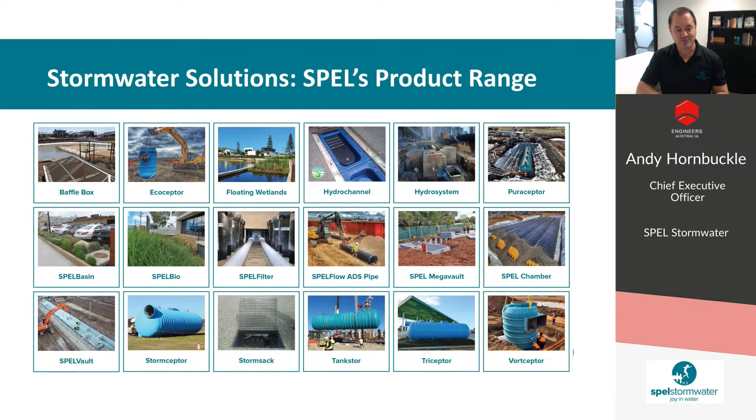So I have a big reveal to make today. Our current name, SPEL Stormwater, no longer actually represents who we really are and where we are really going. The name SPEL has served us very well for a long time, and it's been a terrific part of our environmental journey, stopping oily water, fuel spills and gross pollution from entering our shared streams, rivers, bays and seas.

I'm very pleased to tell you that we've arrived at a collective, unanimous decision that we are going to rename as Atlan Stormwater. Atlan was the greatest king of Atlantis, and he was also known as the protector of the oceans. And that is who we are, and that is where we are going.

Nothing will change the quality of our people, products, and our service, the generational assets you currently enjoy from us. Our values, team, and innovation will remain. And at Atlan Stormwater, we will continue our work as zero pollution ambassadors who wholeheartedly believe that clean waterways are a right, not a privilege. Our commitment to supporting not-for-profits, Rapid Relief Team and Stormwater Shepherds will continue.

As the founder of Stormwater Shepherds, I can't resist this opportunity to promote Stormwater Shepherds' mission, which is to guide and inform communities and councils how to better maintain their stormwater infrastructure to tangibly stop plastic and gross pollution at the source. As many of you know, the stormwater network is the unfortunate and unsuspecting conveyance system or highway for plastic and gross pollution to reach our shared streams, rivers, bays and seas.

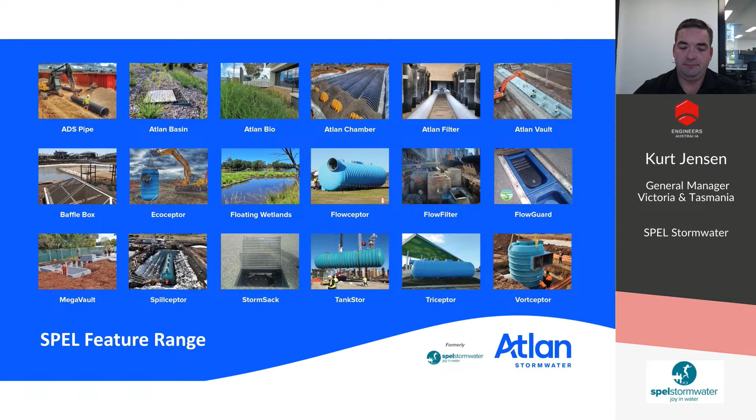With SPEL, we have an entire range, from green to grey, you might say from wetlands to GPTs, oil water separation, everything in between. That's our lineup, and it's all built here in Australia. There's a few images of our fiberglass plant and our rotomolding plant. We also have multiple concrete facilities across the eastern seaboard of Australia.

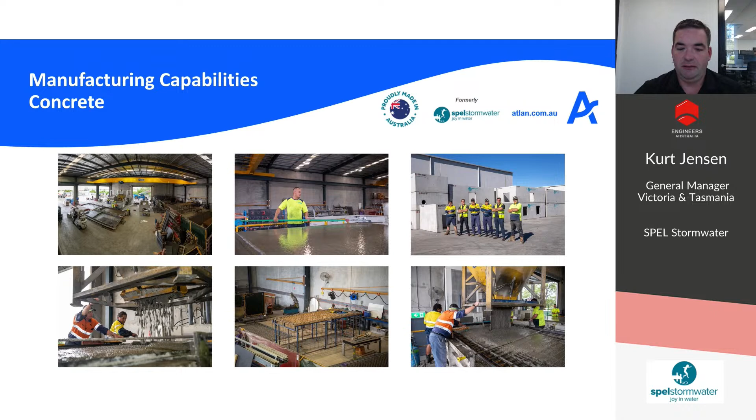But taking a whole catalogue and putting it into a family or groups of products is what we like to do most. That's where we add value to what you do. We become a partner, not a supplier. We become part of your family, an indispensable asset to you.

So starting at the top here, we have our primary treatment. This is where we're focusing on gross pollutants and suspended solids. It's the start of any treatment train. We have options for engineers, councils, and contractors. So there's 4 different GPTs, from your typical pit insert sack through to your well-recognised continuously deflective separating Vortceptor.

We have multiple tertiary solutions. So that is our Hydrosystem, the SPEL Filter, the Hydrochannel as our mechanical, you might say, rain garden in a tank style treatment. Then we have our green assets, which are the floating wetlands and the SPEL Basin, along with our SPEL Bio. So there's options in the tertiary end of the world as well.

We get into detention or water storage underground for harvesting. We also have options. So we have our fiberglass tanks, our chambers, our SPEL Vault, and our MegaVault. These solutions provide more flexibility for you. We also have our pipe, which many of you would know of, and our oily water separation. I guess it's about having more tools in the engineering tool belt.

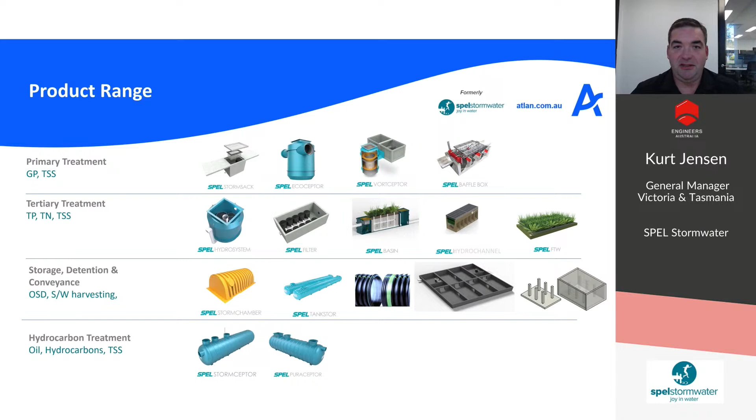And then we take that range of products and we place it into, I guess, a tangible treatment train. This is really where the rubber hits the road. We, I guess, have learnt over the years that no single asset will do a whole treatment train efficiently.

If you get just a bioretention system and put gross pollutants and neat mud into it, it isn't very efficient. It's the same as a gross pollutant trap, not very efficient at phosphorus and nitrogen. So we believe in treatment trains, and that's how we design our projects. Typically we'd start with a primary treatment solution, then have a tertiary treatment device, and then detention would fit in there as well. We can help you model these through MUSIC.

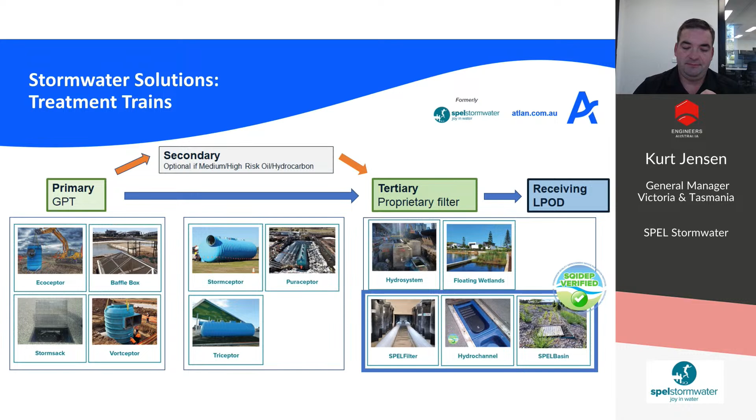Thank you, Kurt. A topic I'm super excited and passionate about. I'm currently serving on the Stormwater New South Wales Committee, and previously served on the UDIA Circular Economy Committee, and I've been witnessing the fields of engineering and sustainability aligning closer together. We're still not there, however, and more has to be done to ensure that the transfer from linear economies to circular economies is both successful and seamless.

As the water industry is essential to any economy, the Institute for Sustainable Futures at the University of Technology Sydney has released quality research on this topic, and they've identified stormwater as one of the five main pillars of the whole cycle. Hence, developing innovative and sustainable solutions that stop pollution reaching our precious waterways is absolutely fundamental to a thriving circular economy. So on that note, I'll hand back to Andy to present some of our innovative stormwater quality improvement devices and solutions that are revolutionizing the industry, positively contributing to future thriving circular economies.

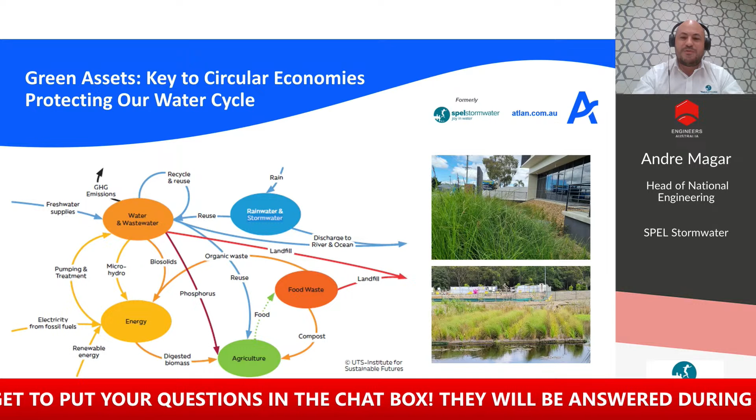Thank you very much, Andre. I'm really excited to speak to you about floating wetlands. Everybody has a pet product, and floating wetlands is my pet product.

So when we're engaging in building man-made floating wetlands, we're actually engaging in biomimicry. And this is what I love about it—we're just taking nature's processes and pathways for pollutant removal, and we're mimicking them.

So what is the difference between a conventional wetland and a floating wetland? On the screen you can see a sectional view and plan view of a conventional wetland. You've got the inlet forebay, and then the macrophyte zone where you've got the wetland plants, and you'll be getting treatment of the water in the rhizome layer of the macrophyte zone, about 250 to a maximum, say, 400 millimeters of treatment. Now just imagine if you dug that out and it was 1.5 to 2 meters deep, an open water body, and we put the floating wetland on top, right where you see those macrophytes, and you've got the plant roots hanging down into the water column 1 to 2 meters deep. What you've just done is taken what was a 250 to 400 millimeter treatment zone and tripled it. So we have this massive scalable system in the same footprint, and that is the power of a floating wetland.

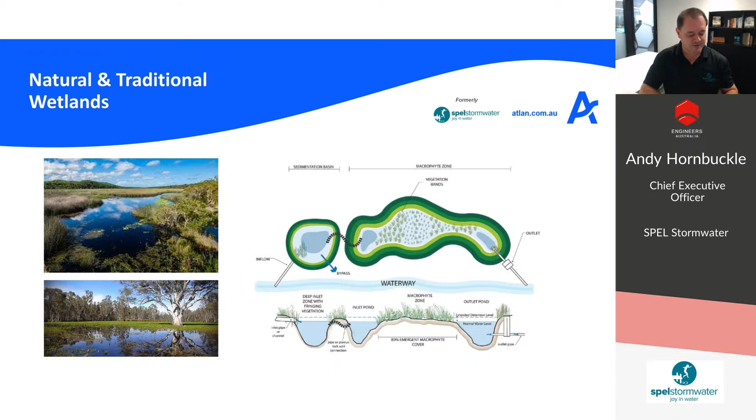It's very simple science—there's no black magic about it. It truly works. What we're really doing is engaging in biological warfare: getting more of the good microbes to compete with the bad nutrients, the pollution in the water, and remove it.

In any given water column we have 300 to 600 species of microbes generally. When you put a living surface area like plant roots into that water column, you're providing them with a habitat to live in, because the plant is alive and it's putting a layer of oxygen into the bottom layer of biofilm. So it's a very healthy, robust environment for the microbes to live in, and then they help to filter and treat the water from there. The plants also take up nutrients and help filter the water as well.

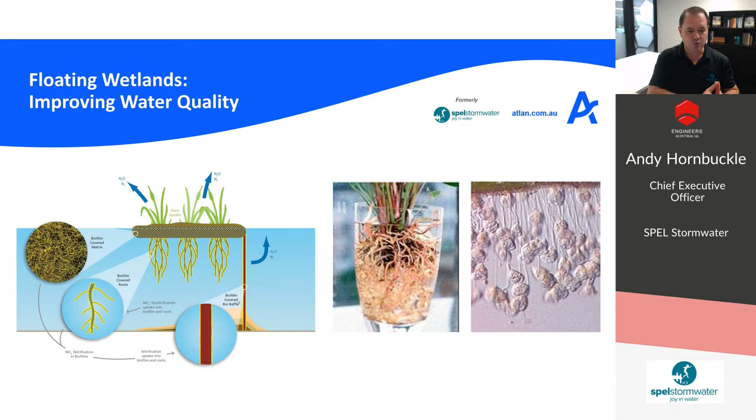The thing with floating wetlands is you've got to get the plant root system to come into contact with the water column. In our picture on the left, from a wastewater site, we've put a curtain off the back of the wetland, chain weighted to the base of the lagoon, with slits in the top of the curtain, forcing the water to come up and have contact with the root system. We work in wastewater, freshwater, and also brackish or saltwater environments, so the wetland systems are very versatile.

We prefer to put these systems offline because it helps with retaining sediment. When you've got an inline system and get high velocity, large flows of water coming down that waterway, you can have sediment resuspended. We've got very good designs, which we don't have time to go into today, whereby we can set systems up offline but still work with fluctuating water levels when you need to.

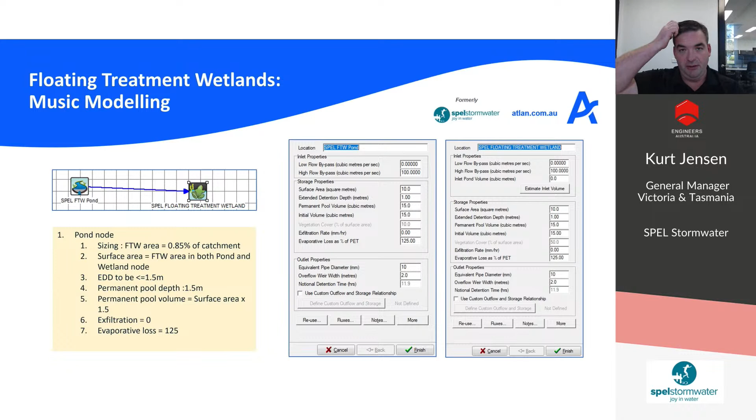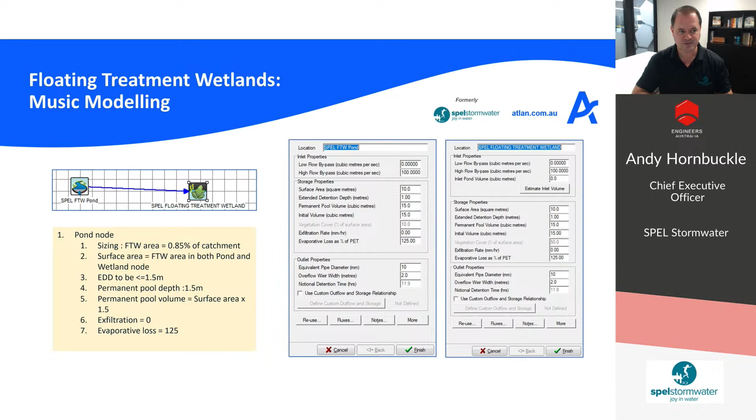Probably just one quick thing I'd point out on that slide is that the 0.85% of the catchment is for when you're modelling for an 80, 60, 45% reduction in the MUSIC program for suspended solids, phosphorus and nitrogen. If you actually have a treatment train, it could be less than 0.85% of the catchment. Is that right, Kurt? Yes, that's correct, and that's why it's our starting point. That's your rule of thumb, and then you confirm, refine and downsize from there.

So the second big reveal for today is that we're releasing a new floating wetland technology onto the market. You can see the two triangle floats on the screen here, and then we've got a removable plant box which we can have loose media in.

We've got over 15 years of experience with floating wetlands across hundreds of projects globally. We've developed this product because we wanted a system with highly engineered anchor points for inline applications and for large lake applications where you get a lot of wind chop and even waves.

So we've designed this wetland to be very flexible and to be able to move with the water, not against it, like a hard, rigid pontoon. As you all know, water is a constantly moving surface, and anything that's constantly moving is destructive, so we've designed this wetland with that in mind, that we will move with the water, not against it.

A key advantage of having the inset basket with the removable media is that, as you know, wetland plants have a life of between 3 to 6 years, just depends on the situation and geography. What we've found with some wetlands is that we get invasive aquatic weeds or weed species getting into them, and it's very difficult to remove and replace. What actually happens is the plants completely take over and become a big mass of organic matter, which makes it difficult to remove any noxious species that get in there.

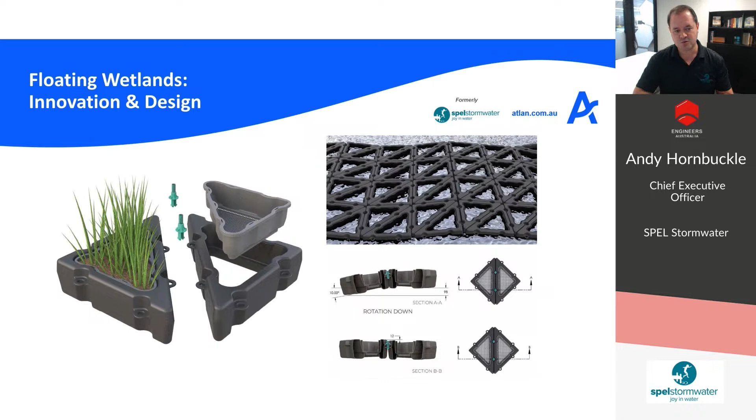The two locator or joining pins that you can see there are designed with an anti-vandalism element, so there's a method and a tool involved to be able to remove those. We're very excited about this product.

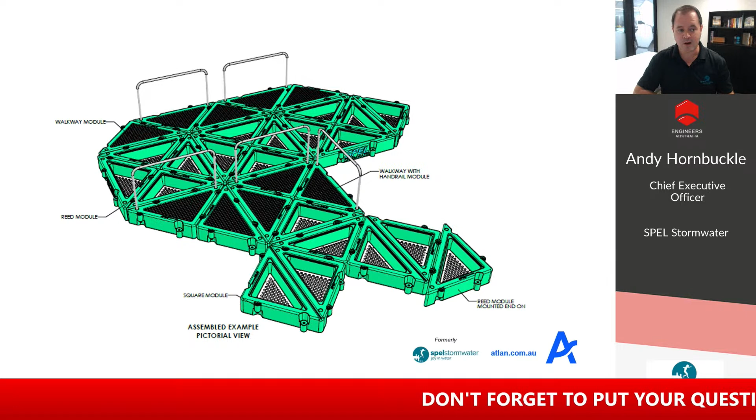The other thing is that we've done it as a triangle so that we can pretty well make any shape. So if you've got a wetland you need to install that needs to follow the contours of a bank, a stream or a canal, we can shape the wetland as such. We can also have an inset to make safe walkways, and we've got locator pins for handrails, which can also work to support bird netting.

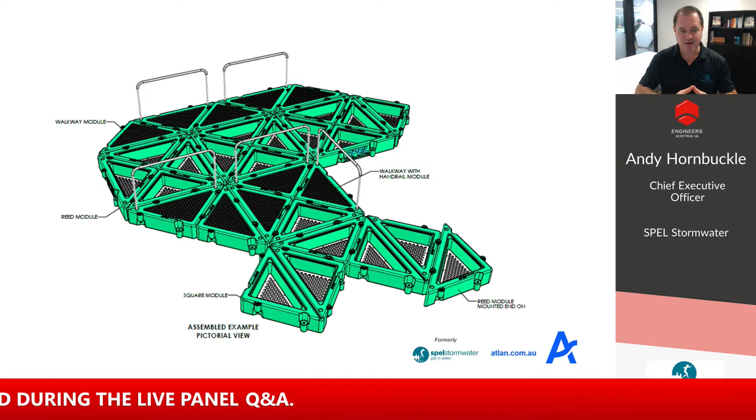As many of you know, when you first install a wetland, be it a conventional or a man-made floating wetland, water hens can be quite destructive on our plants. So sometimes in an area we need to bird net. So this system has been designed with that in mind.

Now, we've been engineering and working on this for a long time, and we've stress tested the product both in CFD modeling but also in the field, and we have a high degree of confidence on being able to install these systems in line. You can see the stress points there. So it's been an iterative design where we've kept on stressing the wetland and also taking into account the velocity drag caused by a fully grown system with plant roots in it. And we feel that we've arrived and we can now bring this product to the market.

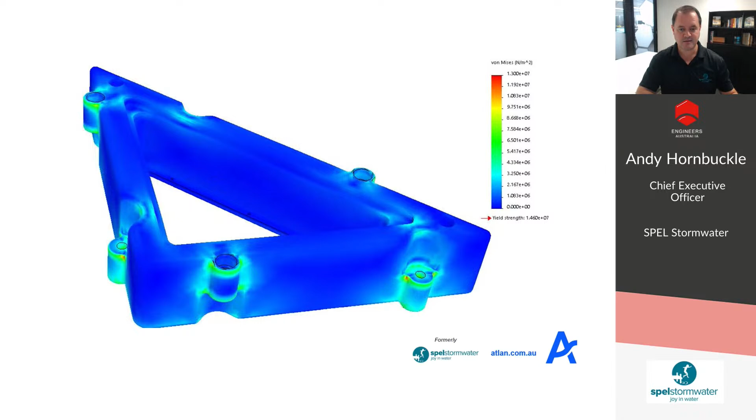So at SPEL, we have invested heavily in research and development over a long time. I first started investing heavily in R&D in 2012 when we brought the SPEL filter technology from America to the market. And the first thing the council said to me in Southeast Queensland was, look, the American data looks great, Andy, but come back when you've got some Australian data. So I set out and did that. I came back, I partnered with the Queensland University of Technology.

The first thing we had to do was work out what was our test protocol, because there was no test protocol in Australia. So we looked at the Auckland protocol, we looked at the German DIBt protocol, and we looked at the American Washington State Department of Ecology protocol, and we tried to pick the best of those that would work for the Australian climatic conditions and the site that we're working with to develop with QUT this protocol that we tested to.

I was really excited when I got 8 qualifying rain events, went back to the council and said, look, here's my data. And they said, well, that's great, but we actually don't know how to assess this. And this is where the whole lobbying Stormwater Australia and talking to them about developing a stormwater quality improvement device evaluation protocol started to happen in the industry in 2014.

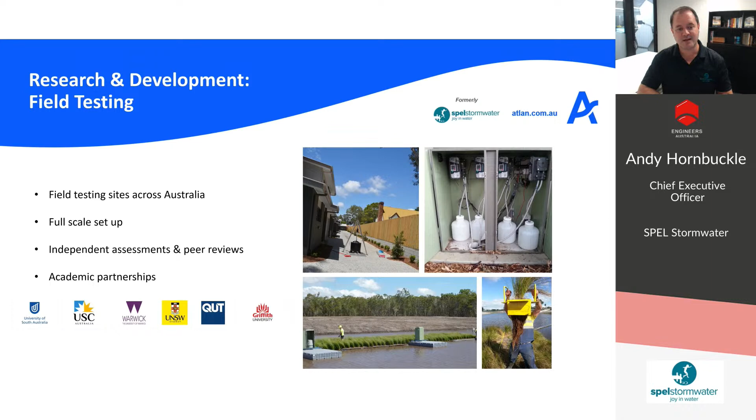So I'm pleased to talk to you about that because SQIDEP, as we call it now, governed by Stormwater Australia, is well and truly up and running and supported by many major councils in Australia, like Gold Coast City Council and Brisbane City Council, just to name a couple. It's also supported by Sydney Water as a major water utility.

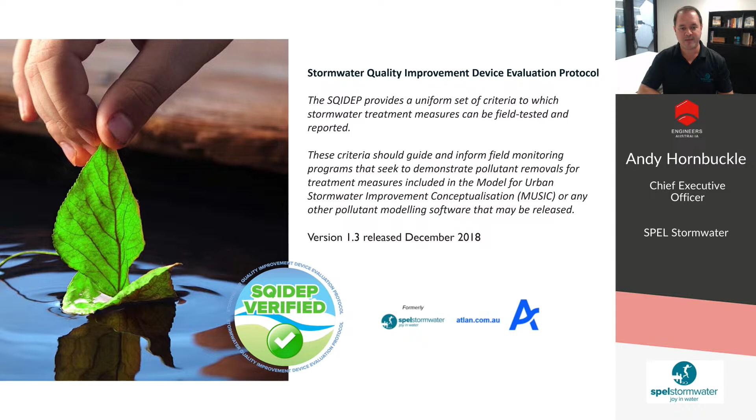So what the Stormwater Quality Improvement Device Evaluation Protocol does for councils is that it provides a uniform set of criteria which has been peer reviewed by the industry and also by a university in Melbourne. It provides measures which proprietary device companies can test any stormwater improvement device against and then see how it performs on an apples for apples basis.

So the problem that councils were facing is that they needed subject matter experts in their teams with the time capacity to assess multiple manufacturers' performance claims. And before this protocol came out in Australia, all the manufacturers were testing with the best intent, but all with slightly different methods. So the beauty of SQIDEP is that everyone has one method to work to. We're not saying it's perfect. There's a review on it coming, and we'll continue to perfect it as we move forward as an industry. But it's certainly very exciting to have a protocol like this up and running, independently governed by Stormwater Australia.

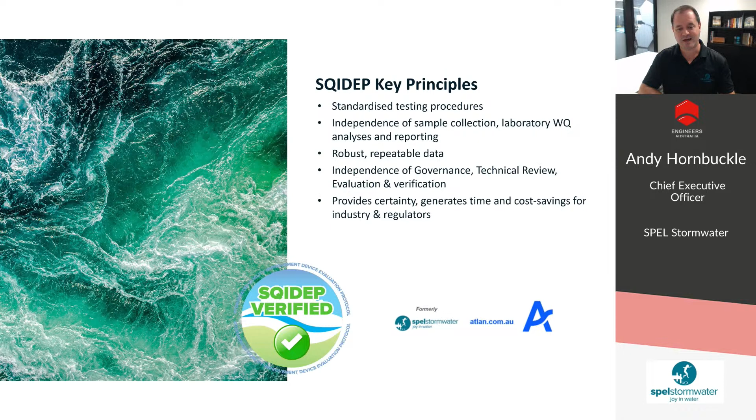The advantage for the manufacturers in working to the SQIDEP protocol is that it's one benchmark and test point that councils can point to, so we don't have to go around to each individual council getting individual approvals for every product every time. As SQIDEP becomes more and more adopted, it will save councils time, it will save consulting engineers time, and it will save proprietary device companies time in working together more cohesively.

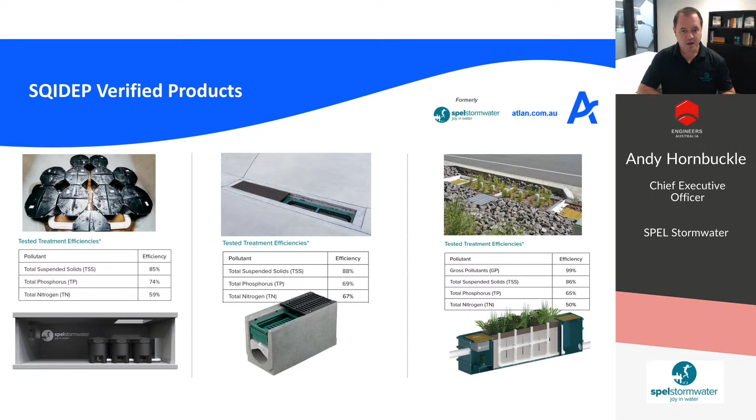So SPEL has 3 verified products at the moment on the Stormwater Australia website. We have the SPEL filter, we have the hydro channel, which is effectively filter media and gross pollutant trap in a channel drain, and we also have the SPEL basin, which is our engineered media in a rectangle basin system. We have currently submitted another 3 products to SQIDEP. We have the hydro system, which is our upflow filter media. We have our baffle box, which is a large inline gross pollutant trap. And we also have our storm sack, which is an in-pit gross pollutant trap.

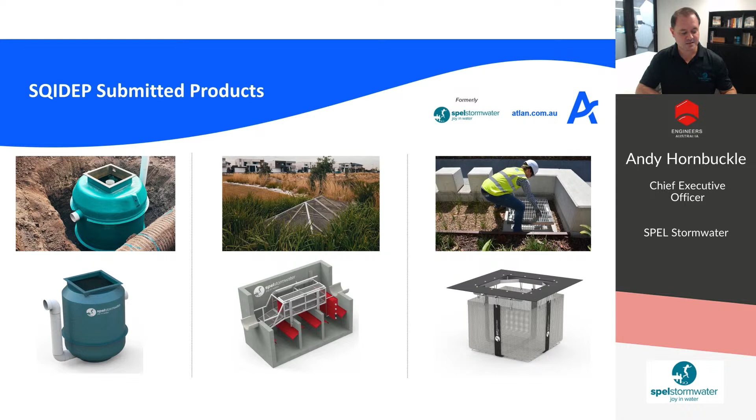So that's an update for you on where we're at with that. And we have many more, well, all of our products are in various stages of testing to the SQIDEP protocol, and we'll keep you updated on those as we move forward.

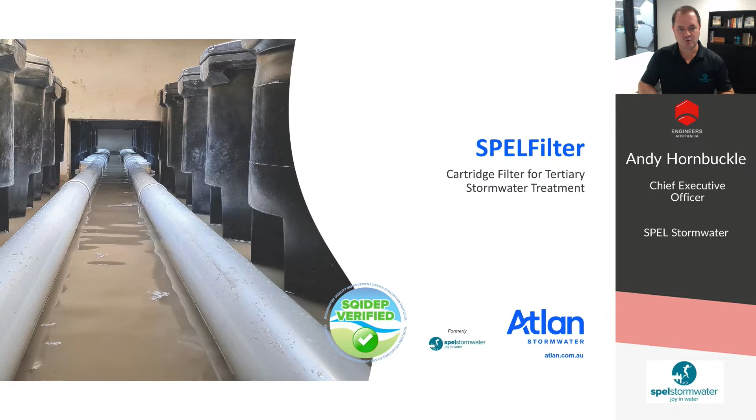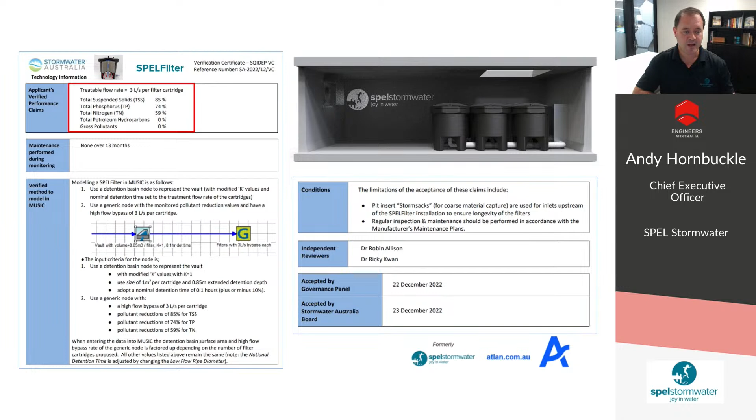It's very, very straightforward. We have 2 cartridge sizes in the SPEL filter. The short one requires a 550 millimeter driving head and treats at 1.5 litres per second per cartridge. And the tall one is an 850 millimeter driving head and treats at 3 litres per second. We believe in simplicity. It's a very simple and practical cartridge design. It's proven over multiple sites to be very effective for suspended solids, phosphorus and nitrogen removal.

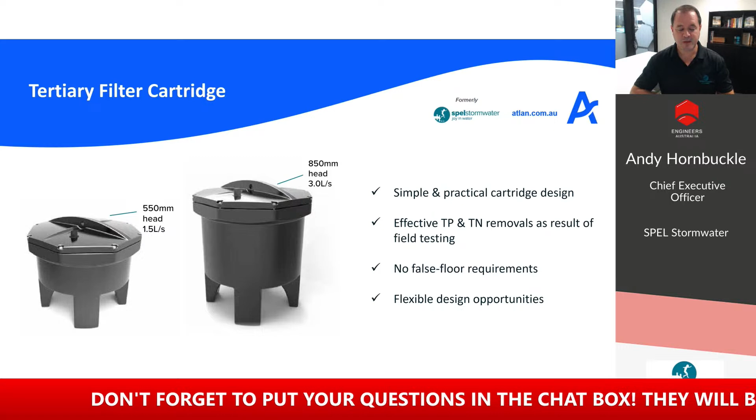There's no false floor requirements for the vault. It can go down in any existing vault if you need to retrofit, treat a site, and we can be very flexible with the design opportunities with the system.

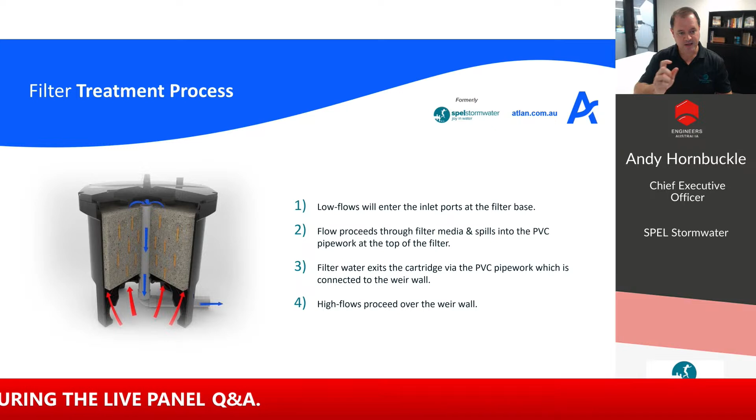So how the cartridge works is that the water comes in the bottom and up through the filter media, and there's a void space at the top for the water to fill, and there is an air release valve. So when the head is fully activated, it actually activates a true siphon, so that these cartridges will actually siphon down a vault, and then when the siphon is broken, it will backflush the cartridge.

We can give a 5-year warranty on any site for the SPEL filter for performance. The only condition being that we have an active maintenance contract on the site. The reason we can give that warranty is because of the backflush function of this device. It means that the filter doesn't get clogged up with the heavy sediment, and it can focus on the fine suspended solids and the nutrient removal, and then we can vac out the vaults when we go and visit the site 3 times a year or every 4 months.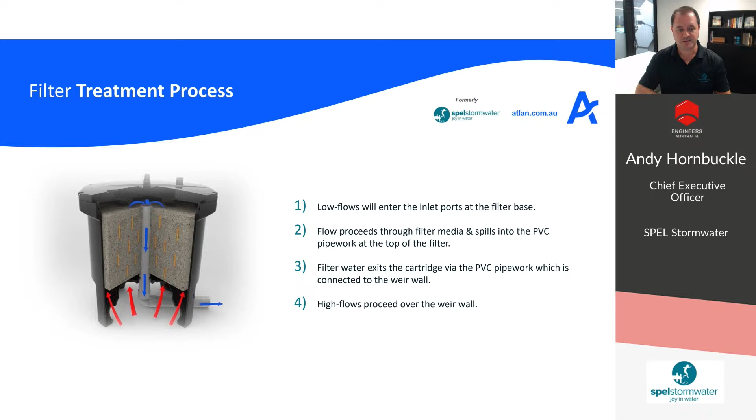We're working with this product to make it a truly swap and go cartridge system, a bit like your swap and go gas bottle from the service station. So this actual HDPE cartridge will last for decades. As we all know, the problem with plastic pollution is that plastic doesn't go away, it doesn't decompose.

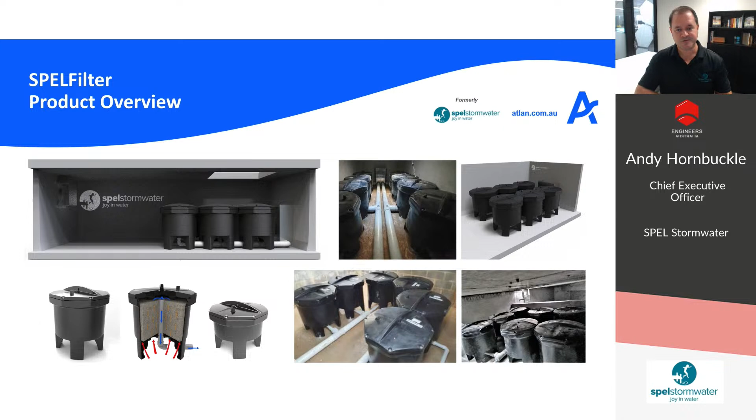So talking from a circular economy perspective, we have these cartridges that we can reuse time and time again. We can reuse them for decades. We just need to replace the media in them to ensure that the cation exchange for the nutrient removal is maintained. So that's it for the SPEL filter. And with that, I'll hand you over to my colleague Kurt again to speak to you about the Hydro system, our Upflow filter technology.

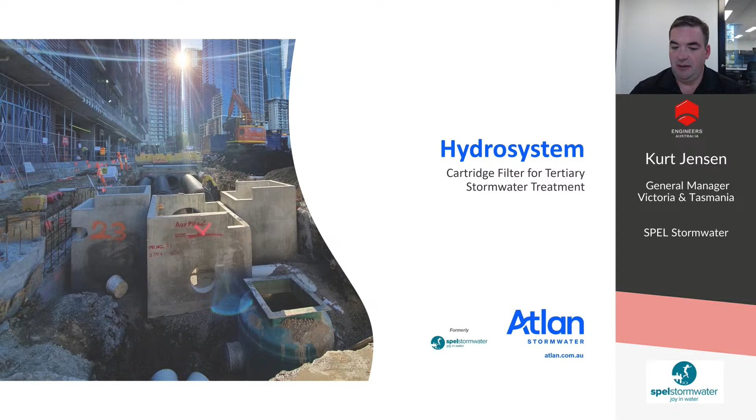The Hydro system is a very, very versatile tertiary device. You can see in this image here, it's on a high-rise building installation. It can be used on many different types of projects, from industrial, residential, high density, medium and low density. It is a tertiary device and obviously built inside our fiberglass structure. It has cartridges in there which are scaled to suit the flow rate required for your site.

It requires 250 millimeters of hydraulic head to operate. That can be configured in anything from 0 to 250 millimeters of fall in your pipe work. So it makes it very flexible, especially for flat sites.

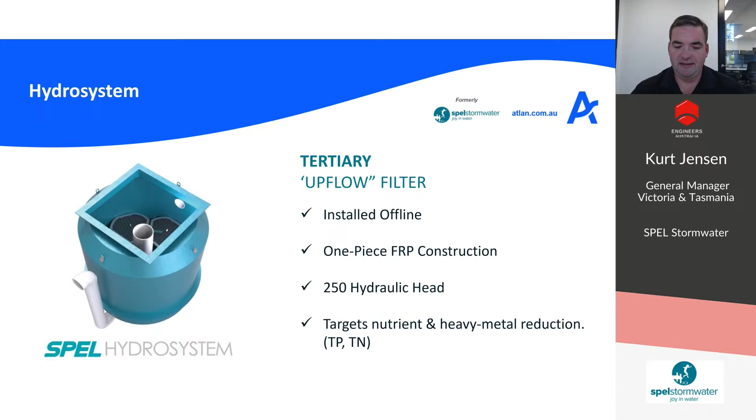How the system works: the water comes in the inlet pipe, which is labeled number 1, drops into the base of the unit, which isn't a massive sump, it's small. This is a tertiary device. It would normally be after either our StormSacks or an EcoCeptor GPT style treatment.

Could be a swale. The water will flow up through the cartridges, which you can see labelled as number 3. And they are just like the SPEL filter. The water passes up and out the top in this situation, and out the outlet pipe in number 4. So it's a wet sump as opposed to a dry sump structure.

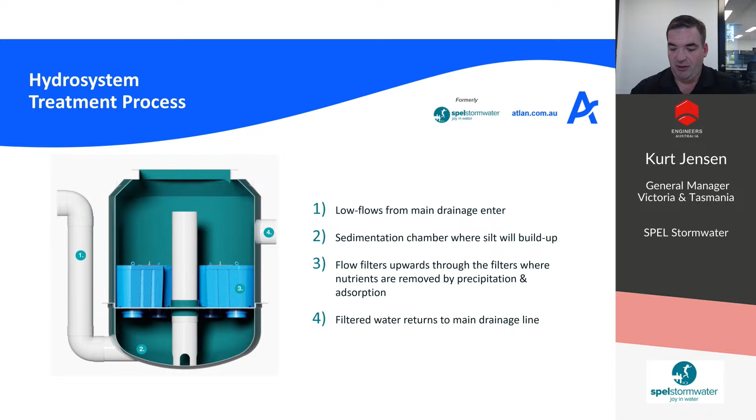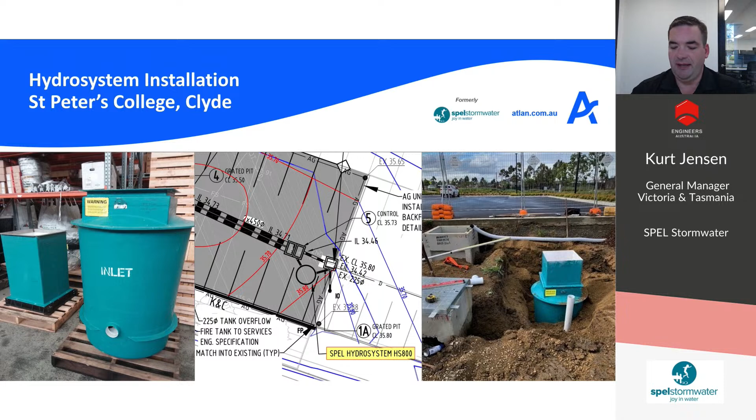Obviously, every project doesn't have the luxury of that sort of install. We do quite a few projects where these are suspended from maybe the underside of level 1 or 2 in the CBDs of Australia. And that is because these buildings have Green Star requirements to hit, and more sustainability targets, which we can assist doing, potentially pick you up a point or two in the whole design and install of the hydro system, or whichever product it is.

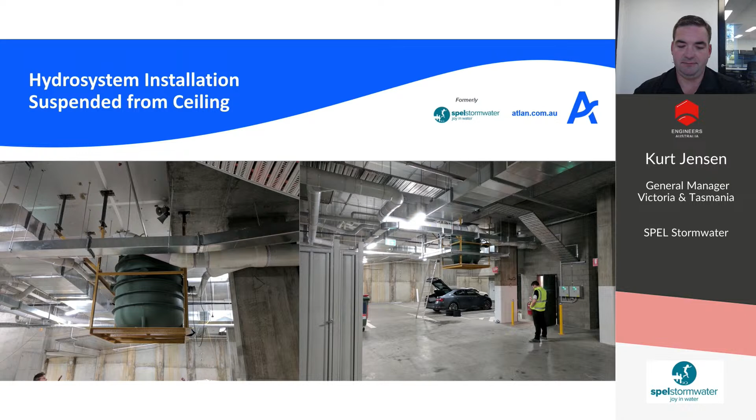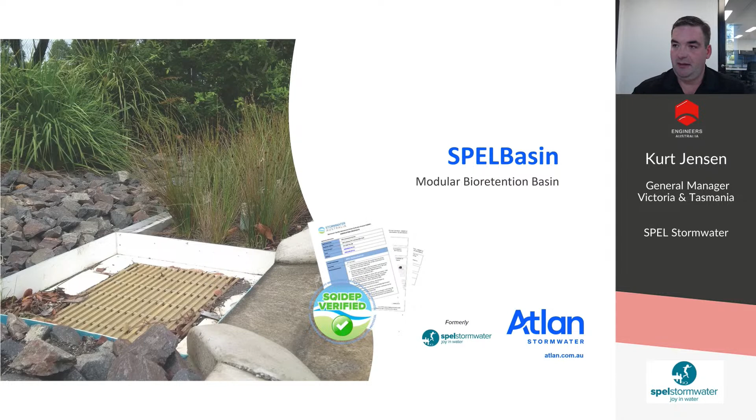So now we change gears a wee bit and go into the SPELBasin. The SPELBasin is a modular bioretention system, and it is SQIDEP verified. There's a screenshot of the SQIDEP verification alongside our Hydrochannel verification. So the basin is verified to 86% suspended solids, 65 phosphorus and 50 nitrogen, also 99% gross pollutants. So it truly is a standalone system.

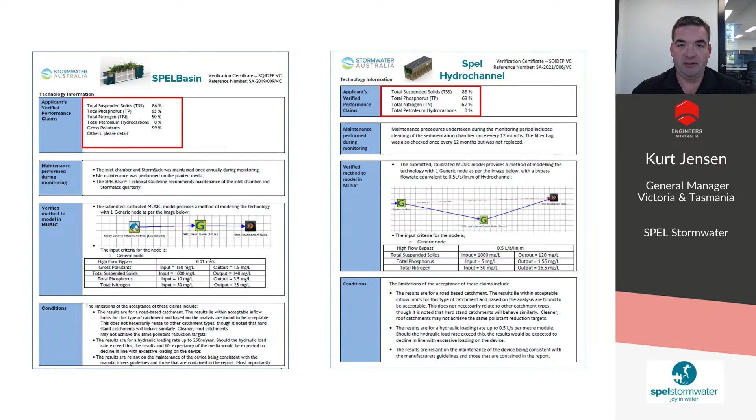The inlet chamber is effectively a gross pollutant trap integral to this system. And that's designed to take out all of your Coke bottles, chip packets, cigarette butts, your gross pollutants, your sediment, and also your hydrocarbons through our coalescing filter. So the water's definitely done its primary and some of its secondary treatment before it actually goes into the media layer.

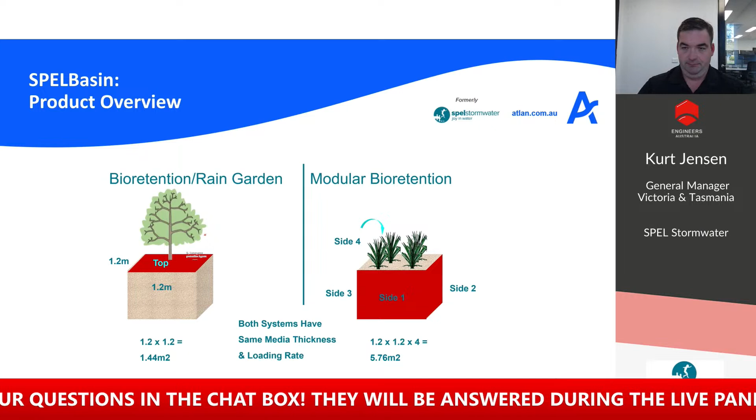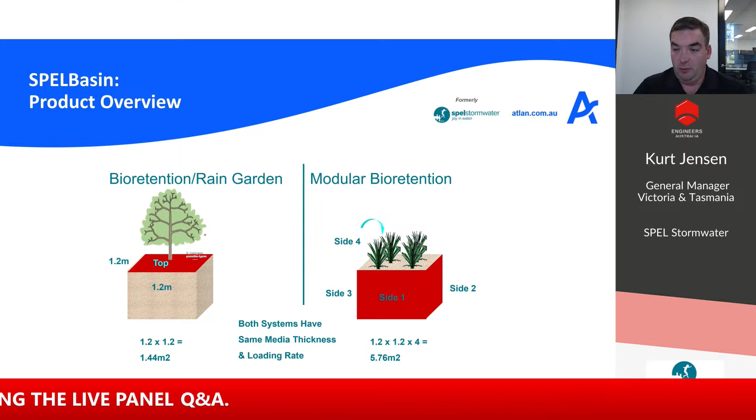This requires less fall or hydraulic grade to make the system activate. It also compresses the footprint, in this instance to just under 1.5 square metres for a SPELBasin, doing the same job as just under 6 square metres for a normal rain garden. So that means we can treat a much larger catchment in that footprint.

What you design as an engineering firm and what you approve as a council will truly be in the ground and functioning to the SQIDEP verification. And that's the benefit of a pre-designed, pre-constructed, prefabricated device that has been SQIDEP verified.

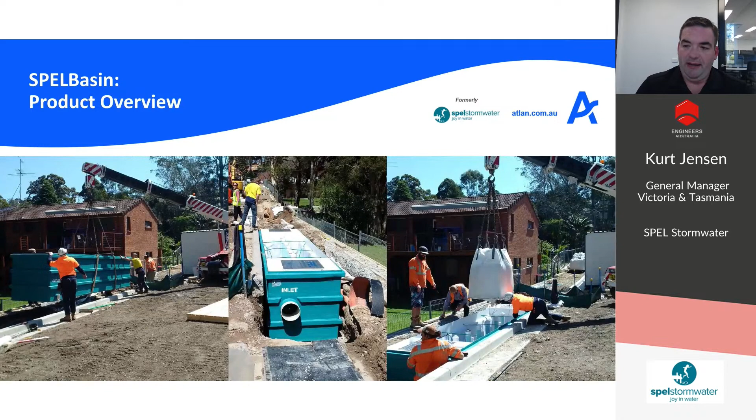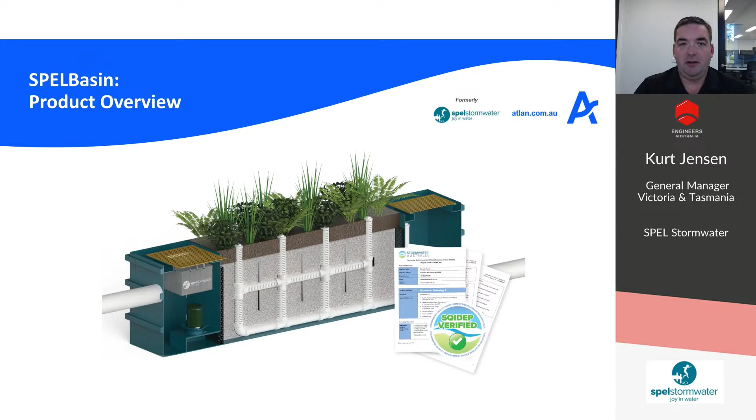If we go back to the section view of the SPELBasin, you can see where that was. That's that left-hand chamber. With a vac truck and a high-pressure gurney to wash that out, rinse it and suck it all out, this will be back to as good as new with zero impact on the filtration media. Truly is a treatment train in a box.

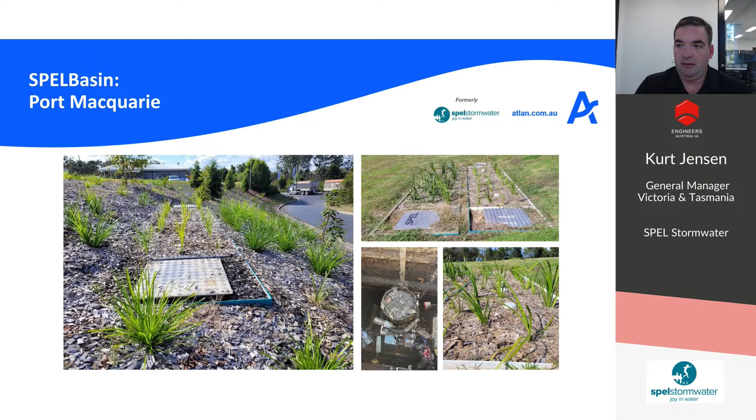The hydro channel, another one of our SQIDEP verified systems, is effectively useful in two applications. One, small developments like you can see, and two, with bypass catchments. So a catchment that isn't going through your main treatment train. Typically, the going way to design bypass catchments is to over-treat your main outlet and not treat the bypass catchment. It's actually very inefficient. Costs a lot more in capital or CapEx and a lot more in OpEx to maintain as well.

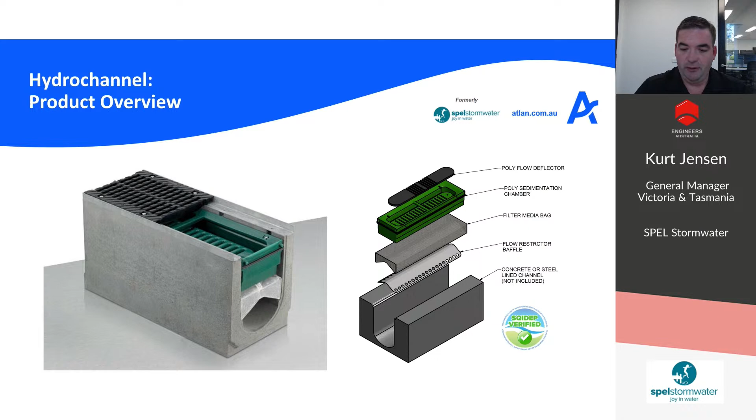The Hydro system solves that challenge. What it is, is a treatment device, a full treatment device. So it's a gross pollutant trap and a tertiary filtration system inside a 300 mil wide trench drain, trench grate or channel drain. You can see at the base it has a flow deflector to make sure we keep a void underneath it. It has a media filtration, and then on top of that, the green part is like your gross pollutant trap with a hydrocarbon baffle in there. It truly fits within a 400 mil deep channel drain, making it very simple.

This next little project here is an example of a bypass catchment. Dan Murphy's little loading dock was falling away from the main outfall by using 3 metres of hydro channel in a 6 metre channel drain. We were able to meet full compliance without doing any changes to the main treatment train.

It saved a lot of drainage as well. This development in Howrah in Tasmania is a prime example of where hydro channel comes into a league of its own. It's a 1,200 square metre parcel of land which had a house on it. It got knocked down, 3 townhouses put on it. One of the challenges with little developments like this is the cost of the stormwater treatment as a percentage of the project value.

The hydro channel here, we're able to configure the roof drainage to fall into the top of it. With the StormSack, only a $4,500 investment, which means the maintenance will be lower, and it's a win-win for everyone.

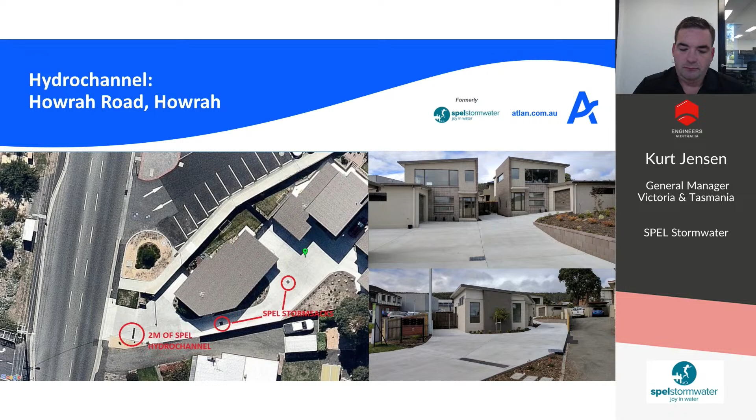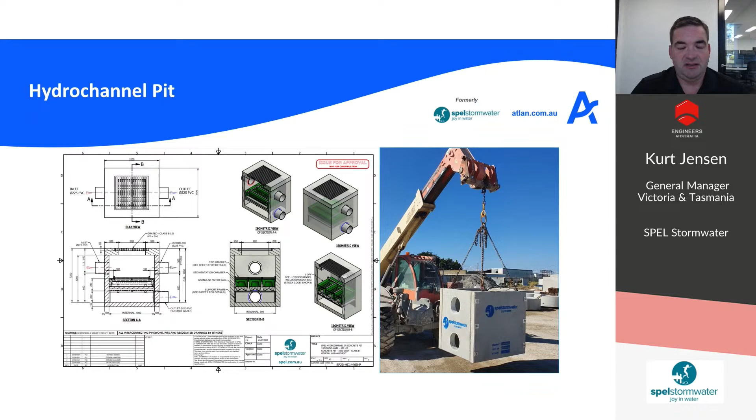We also have the hydro channel configured to fit within a pit as well, so it can be used at end of line as a tertiary device. Just another option. So having all these products, we're able to pull them into a design.

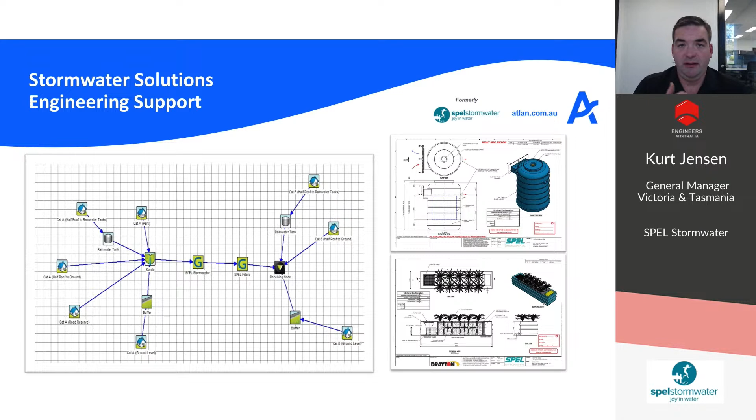Typically the recognised software is MUSIC. We can help you with that MUSIC model, or we can provide you the information to put into your MUSIC model. Once it gets through design, we'll obviously produce working drawings, which can be given to you in CAD, Revit, or whatever you need to model your building project.

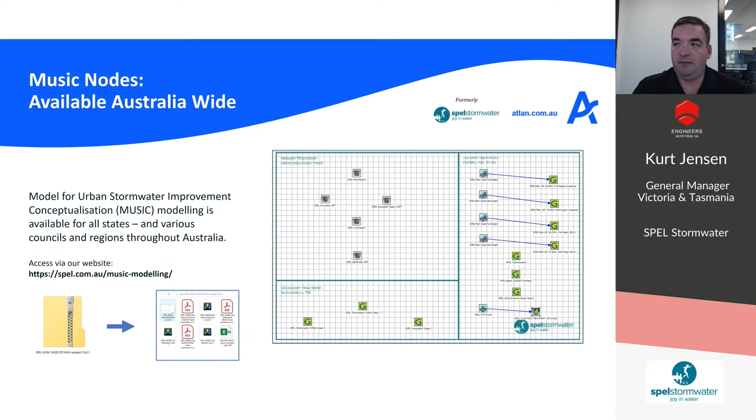Now we'll walk through the Vortceptor. We concentrate a lot on tertiary systems, on phosphorus and nitrogen, the unseen pollutants, you might say. But up front, before all this, is gross pollutant, really the start of a treatment train, is your gross pollutants and your sediment. And this is where the Vortceptor comes in. It uses an age-old technology, continuous deflective separation, and puts it into a fiberglass structure which solves quite a few challenges for contractors and creates one of the world-leading gross pollutant traps.

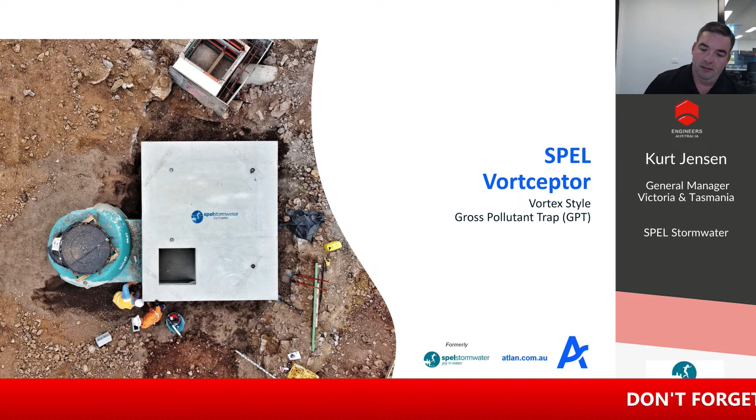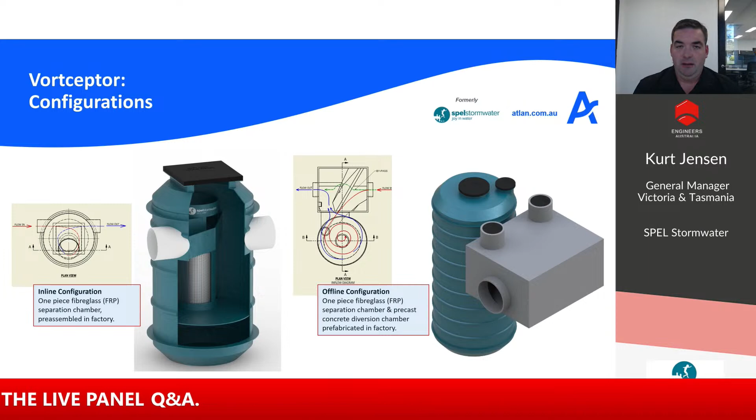Vortceptors come in 2 configurations. Either an inline configuration, which is pipe in, pipe out, or plug and play, or offline. There's obviously horses for courses. The inline system is very easy to install, whereas the offline system is very, very configurable, able to take many different flows and layouts on a project.

Also goes up to much larger Vortceptors. The way a Vortceptor works is sort of like a top-load washing machine. The water goes in, as you can see by the red arrow on both these images, and swirls around the internal screen. Now the water is fed onto that screen tangential to the flow of the inlet.

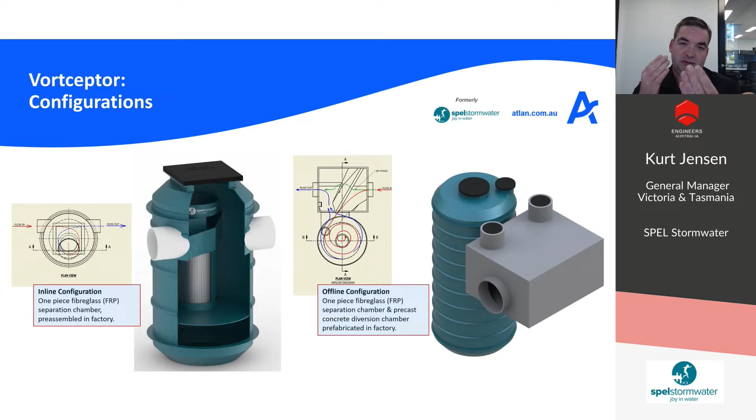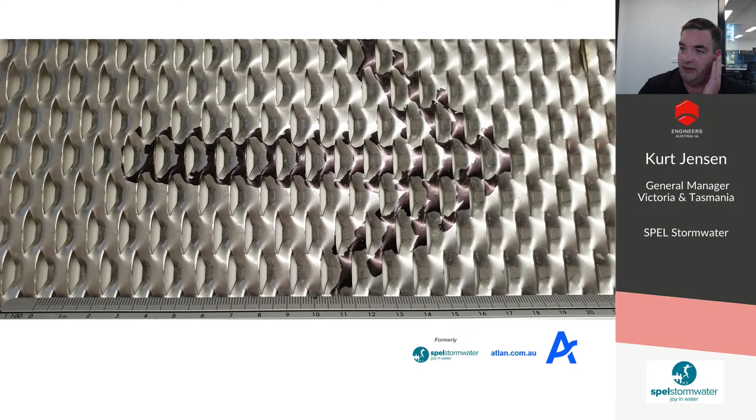What that means when you look at the screen itself in this image is that it's fed along the face of this screen in the smoothest possible way. So looking in the direction that the water flows, it's smooth against it. Looking in the opposite direction back towards the flow, it's sharp. So the way the flow comes onto the screen creates a self-cleaning screen, where the heavy sediments and light liquids will sink and float, but it will keep itself clean, and then the water will do a U-turn and head back out. Very low K-factor, low maintenance as well.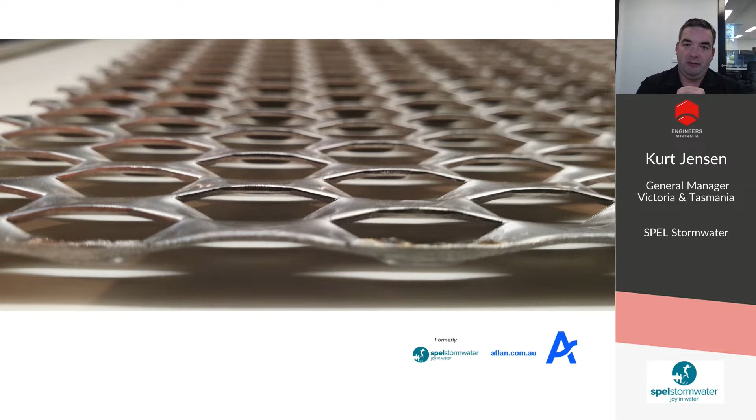We also have incorporated a hydrocarbon baffle into this device. Whilst it's not an oil-water separator, it definitely helps when you're installing it on the likes of an industrial estate.

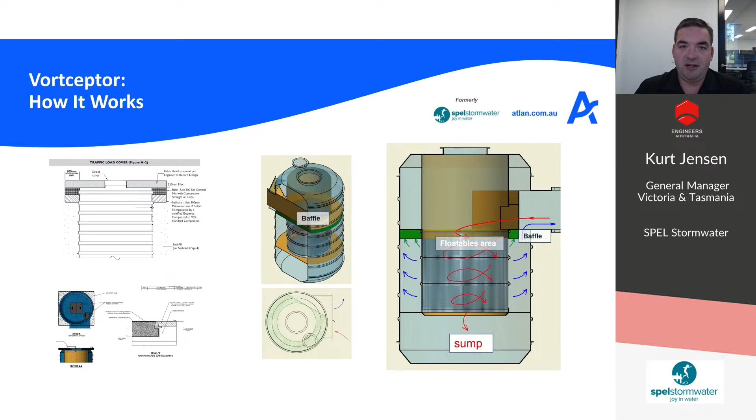These systems are engineered to go into any sort of water table. We can withstand any of your buoyancy requirements, have a specific backfill installation process, and also fully trafficable, Class B, C, D, E, F, G, whichever you require. One of the benefits with a fiberglass device also, all of our fiberglass systems come with a 25-year warranty on the structure and a 100-year design life.

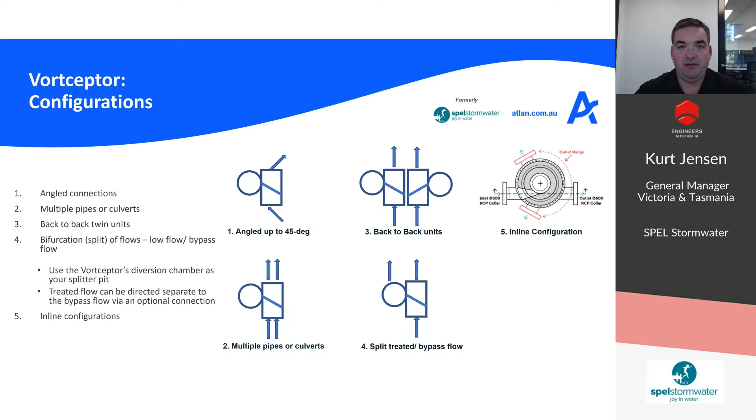The fifth illustration, you can see the inline. We have the flexibility of moving the outlet around the structure, which may help eliminate a junction pit and save money on the design.

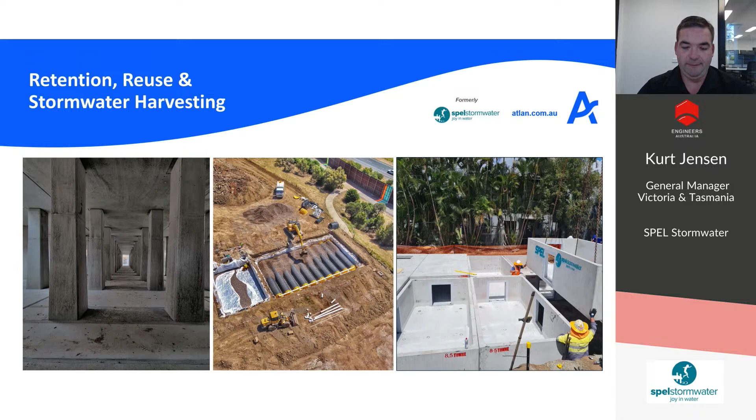And our SPELFilters fit inside these tanks. Regularly they're installed as really a treatment vault and detention combo. These are very, very fast to install, these structures. We did a project the other day, it was 160 cubic metres in 4 hours from start to finish. The SPELVault is exceptionally fast and cost effective, up to around 250,000 litres.

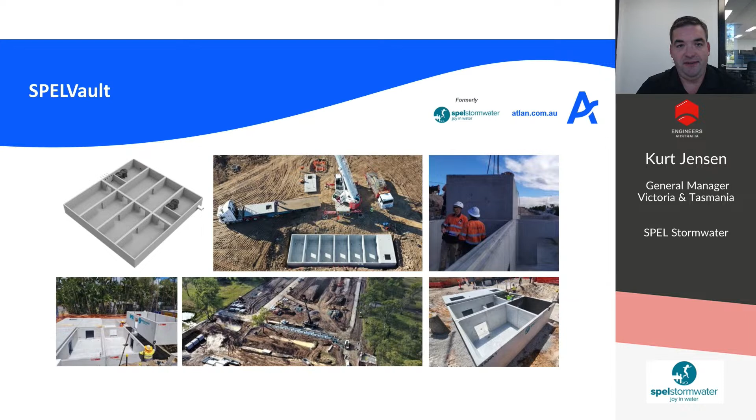And from there, we would move into our Megavault range. Now, the Megavault range is concrete pillars cast into our base plate. These get laid on site. Then your top is placed on and the sides are set alongside as well. The Megavault internal heights range from 1 metre through to 3 metres, so very deep systems to suit the invert levels and grade lines on the project.

Now, we spoke of this SPELVault being cost effective up to 250,000 litres. That's where the Megavault steps in and pushes all the way through to 5 or 10 million litres, or megalitres. We had a 3,000 cubic metre, a 3 million litre tank on the Gold Coast a few months back, which was 8 days from start to finish, 8 working days install for 3 million litres. And that's trafficable, backfilled, drive over, exceptionally fast.

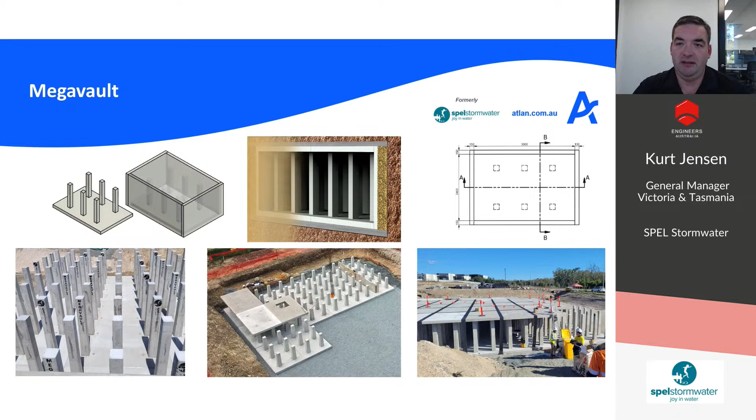And then the SPELChamber. This product here comes in three different sizes, from a minimum of 1 metre deep installed, so it's from finished surface level to base of or outlet of tank, through to a maximum of 2 metres from finished surface level to base of or outlet of tank.

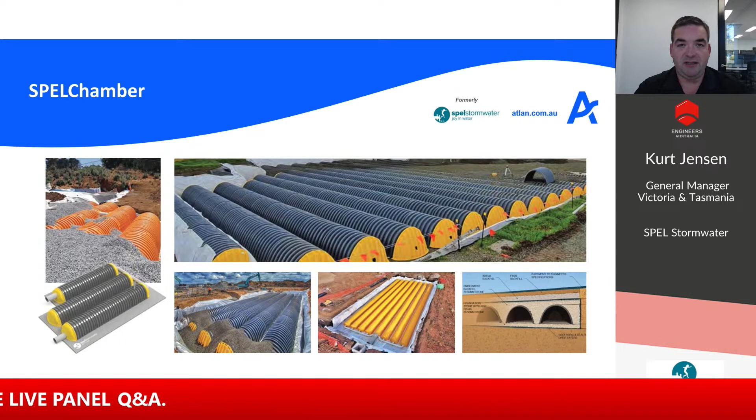And these systems can be surrounded with a liner to make it impermeable for reuse or detention, or they can run as an infiltration structure, useful in sandy areas. We install many of these chamber tanks in installations ranging from 5 cubic metres through to 5 million litres and greater.

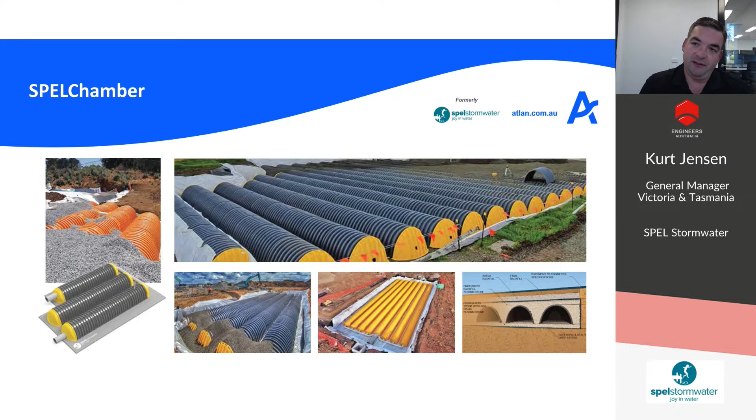Which brings us to the end of the detention product range. I'll hand it back to Andy to quickly run through maintenance.

Thanks, Andy. Well, thank you very much, Kurt. And wrapping up on stormwater maintenance, which is a topic I'm very passionate about. It has a personal story for me because I've been in the industry a long time. I've seen a lot of plastic and gross pollution captured by the many gross pollutant traps in the market, and I've seen the effects when a system is not maintained, not just treatment devices, but any stormwater infrastructure.

There is a clear lack in Australia of funding for the maintenance of our stormwater assets. You can look on Stormwater Shepherd's YouTube channel, where I've got a detailed presentation on my views about that and the need for dedicated stormwater utilities in Australia, like they have in North America and other advanced economies like Germany in Europe. Stormwater maintenance is absolutely essential on stormwater treatment assets if we're going to keep them in optimum operating condition and stop plastic and gross pollution getting into our waterways.

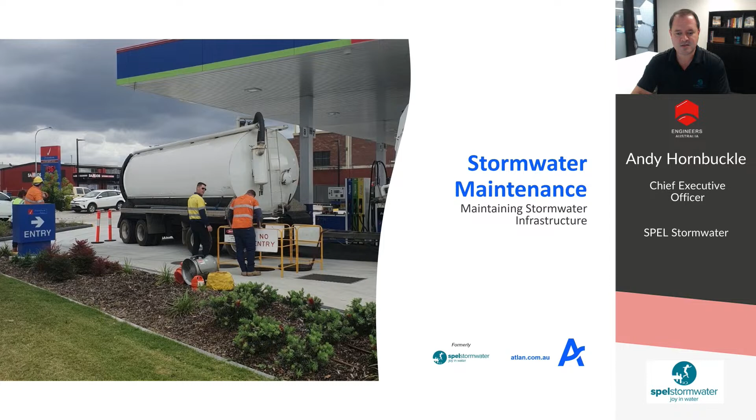At SPEL, we have large maintenance teams in Brisbane, Sydney and Melbourne, and smaller teams in Adelaide and Perth, out there every day beating the pavement and cleaning out stormwater devices. Our technicians are certified to work in confined spaces and to handle contaminated sediment and pollutants, and they're doing a terrific job. We are very proud of them.

What it's meant is that industry has been able to go after and procure that work and maintain those systems and stop the pollution. The next step for the industry is to move into proper funding via the stormwater utilities model that's successfully proven in North America.

You can visit the Stormwater Shepherd's YouTube channel, where I've got a detailed presentation on that, and you can follow us and keep getting updates. Thank you very much for listening to our webinar today and the introduction to the SPEL Stormwater products, and the reveal that in July this year we're changing our name to Atlan Stormwater. Just remember that Atlan was the greatest king of Atlantis and he was the protector of the oceans, and that is who we are, that is where we're going, and that is what we do every single day. Thank you very much, and I look forward to question time.